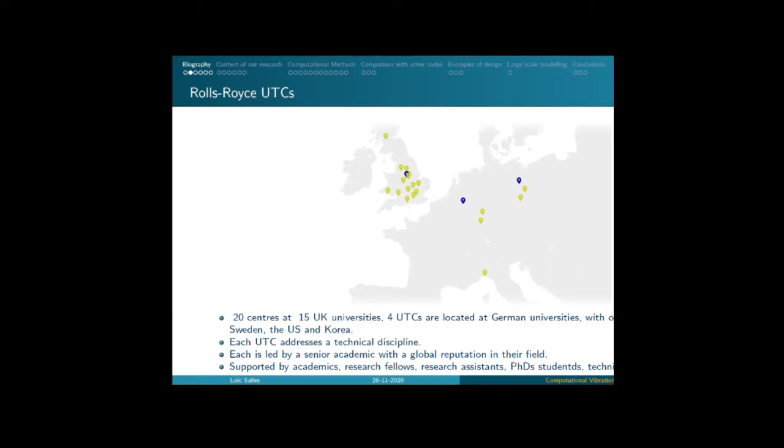So what are UTCs? UTC stands for University Technology Center. They are research centers dedicated to research for Rolls-Royce, funded by Rolls-Royce and also by governments through public funding. There are around 20 centers, most of them in the UK, and each of them has a technical discipline. In our case, it's vibration, and we were one of the first ones funded in the 90s, with the Oxford UTC. In those centers, you get academic research fellows, research assistants, PhD students, and technicians.

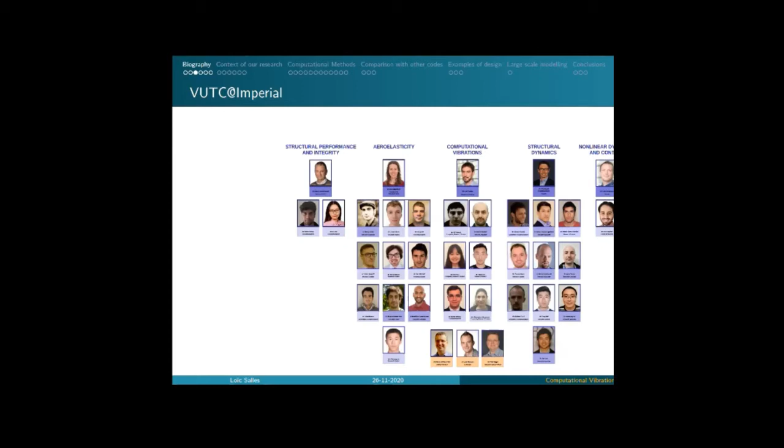So if we talk about the UTC at Imperial, we are 5 permanent people, or academics, with different topics. Some of them joined us quite recently, for example Ludovic Renson, so that's why his group is quite small. And of course, even if we have a division into teams, we all work together, and we have projects where we collaborate. Especially, we have a strong link between aeroelasticity and computational vibration. So that's the team in charge of computational vibration. Of course, people move and change every year, but that's the size of the team I am dealing with.

In terms of topics, aeroelasticity is mainly CFD, and we have a code called AU3D that was started more than 30 years ago, for forced response, flutter, seal flutter, all the things that can be an issue in an aircraft engine. Then we have computational vibration, which I'm in charge of, where we develop a code, FORSE, and I will talk more about it. Then we have structural dynamics, led by Christoph Schwingshackl, which is more on the physics of the dynamics, and also all the experimental work needed for the numerical methods, both for validation and to get the data to put in our models.

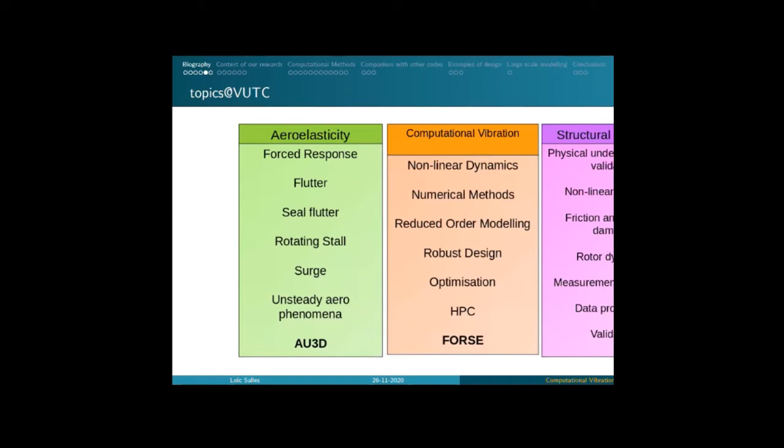So what is computational vibration? I came up with this concept. The idea is that instead of doing just vibration, we do vibrations, but with models that can represent large-scale structures. And for that, one important thing is that we need computing: high performance computing and very efficient algorithms.

So you need people that know computer science. Of course, we need the mechanics to understand the physics of what we are modeling. And we have a strong emphasis on mathematics, even if we are not mathematicians. So computational vibration is the mix of these three domains of research. And what we want is to develop efficient numerical methods for nonlinear vibration of complicated systems.

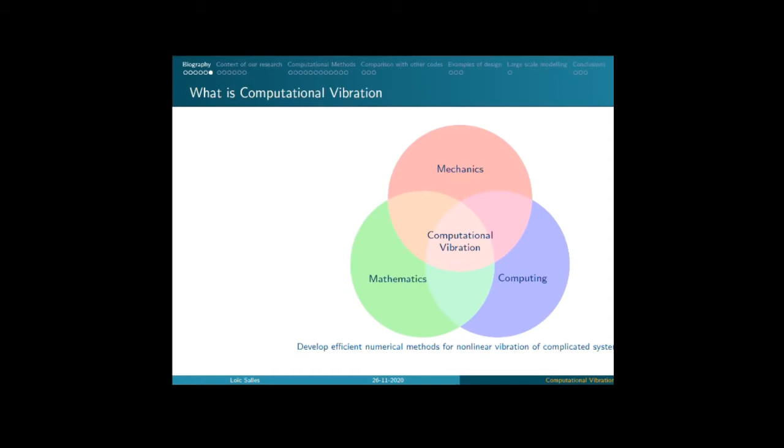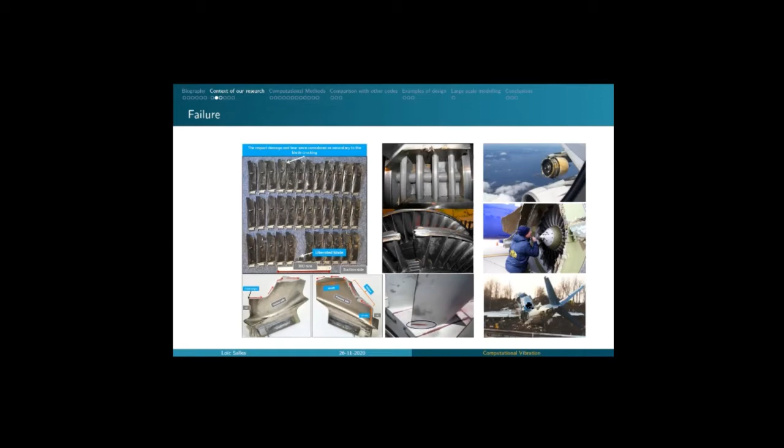And now, by complicated system, I will show you an example of one complicated system, that is an aircraft engine, and I will explain why we need to work on vibration. Unfortunately, when there is vibration in an engine, it can finish very badly, and it can lead to failure. So it can be just failure of the blade because of cracks that are propagating. And this is all right if it just stays in the blade and nothing else. But sometimes you can lose part of the engine, can lose a blade and it can go to the cockpit, or even worse, you can have the aircraft that crashes.

So I was quite nice. I gave 3 examples of 3 different engine manufacturers, but I won't say who is who.

In terms of method, the way the engineers deal with that is that they do a high cycle fatigue computation, and of course it's numerical with experimental validation, and of course their experience. You start from the geometry, you do what is called a Campbell diagram to compute the modes and see where you can have some excitation. Then you need the CFD, and you need to have a really good CFD code to be able to forecast the loading. That will allow you to know where your stress constraint is and where you may have issues, and then you will see if you have issues in terms of reliability or fatigue.

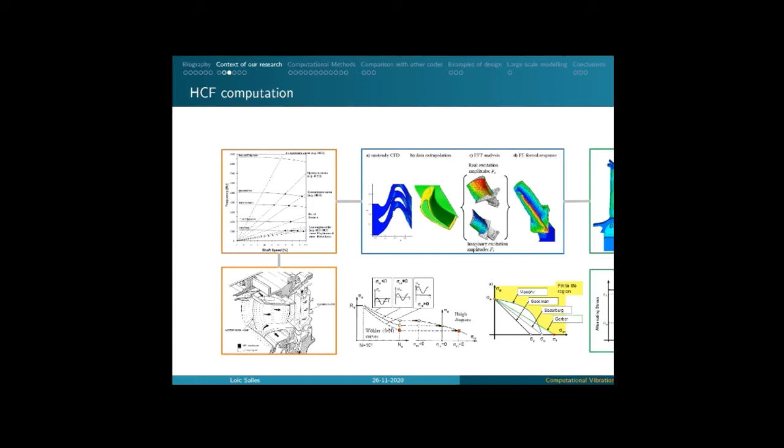And if you have issues, there is this kind of diagram that is called a Haigh diagram. If you are below this curve, you are okay, no real risk. If you are in this area, there is risk and you need to find a way to go below. And one of the ways to reduce the stress is to add damping to your system. And at the VUTC at Imperial, we work a lot on how we can model and design this kind of damping.

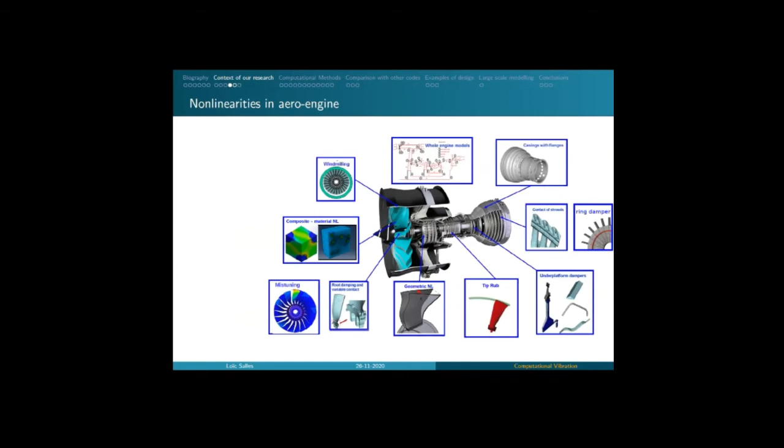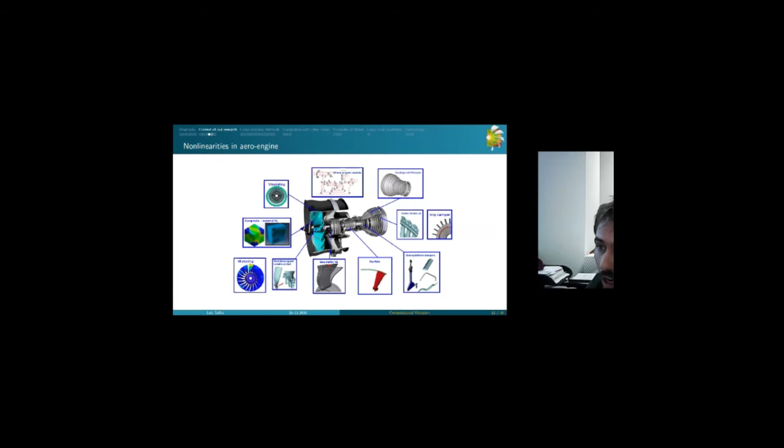Of course, the focus of our center is nonlinear vibration, because for linear vibration, I won't say it's sorted, but the methods are well implemented in industry and they know how to do it. But as soon as it becomes nonlinear, it's a little bit more complicated, and the methods are still in development. You can have a lot of nonlinearity in aero engines. It can be related to the contact that you have between, for example, the blade and the disc in the fan. It can be in the shroud. It can be also on the static part, so the flange in the casing. But also sometimes you will add some nonlinearities to increase damping, for example, under platform dampers.

Then you have other sources of nonlinearities which are a little bit more complicated and can be really a disaster, when the blades touch the casing. So if you have a tip rub event, or also if you lost a blade and you start to have windmilling, even if the engine is stopped, the engine can still vibrate and the blade can touch the casing. A new thing related to the new design of blades is geometric nonlinearities, and Alessandra will talk a lot about it, so I won't focus too much on it. So as you can see, there are a lot of things in terms of nonlinear vibration that you may have to deal with when you design an aircraft engine. So for us, it's really a nice tool to develop new methods and to work on these interesting phenomena.

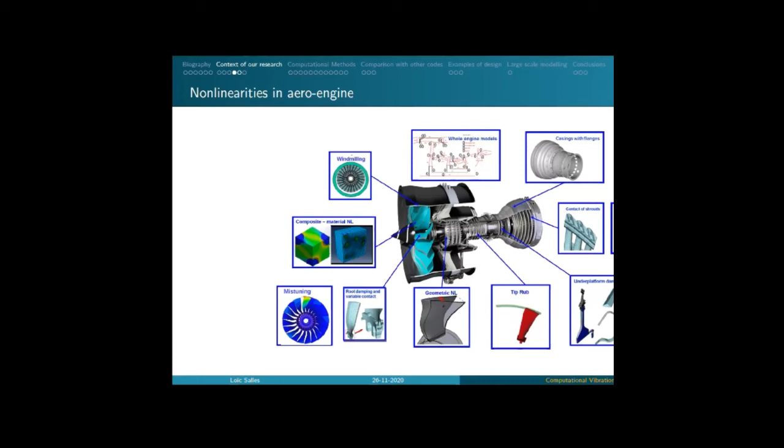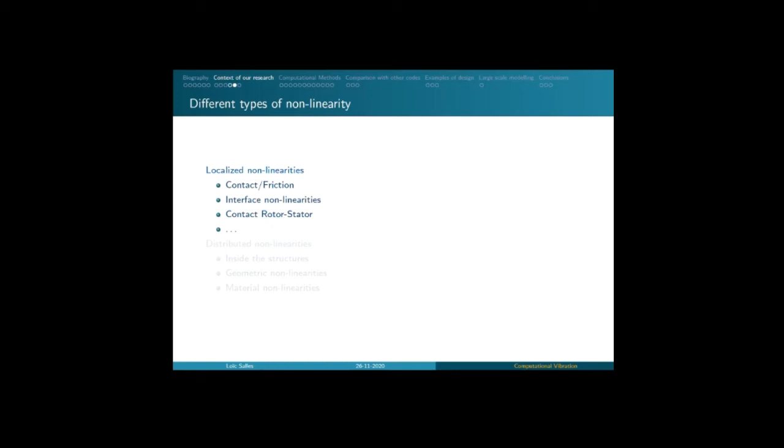If we look at the nonlinearities in our community, we like to divide them in two families: what we call localized nonlinearities, so contact friction, interface nonlinearities, or contact between the rotor and the stator. Localized nonlinearities means that we consider that the nonlinearity is only at the interface and very limited to an area of the structure, and that we can consider the rest of the structure linear. And that has a huge advantage, especially when you develop reduced order modeling techniques.

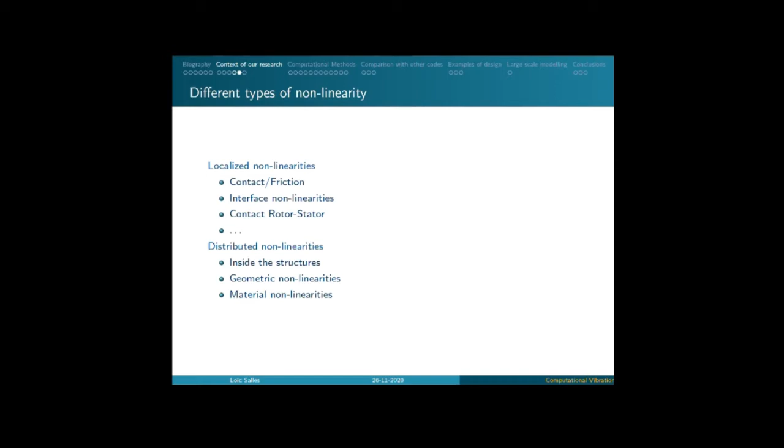On the other hand, opposite to localized nonlinearity, you have what we call distributed nonlinearities, which is what happens inside the structure. That can be geometric nonlinearities or material nonlinearities. For example, if you have a composite material with carbon fiber, you can have the behavior of your matrix and also the behavior of the carbon fiber with the rest of the material. So of course, we develop different techniques depending on whether it's localized or distributed nonlinearities.

At the VUTC and for Rolls-Royce, we have a code that is called Forced Response Suite. It was started 20 years ago by Evgeny Petrov, and it's developed in modern Fortran with an object-oriented programming paradigm. So in terms of programming it is modern, even if it's Fortran, I mean the paradigm that we use. It's more than 100,000 lines of code. And the interesting thing is that just the pre and post processor has more lines of code than the code itself.

And some figures: the code is used every day by Rolls-Royce for the design of new components and also for understanding unexpected events, so when there is an issue. And it's used by approximately 50 users.

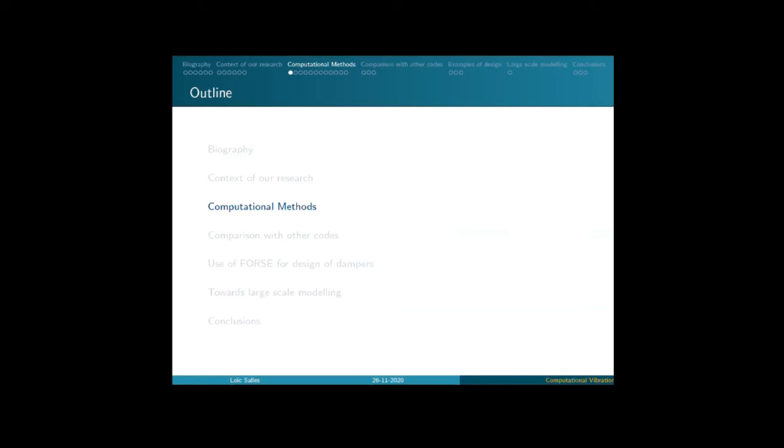So what are the methods behind this code? Before going into detail in the method, even if I won't go really into detail, it's how we organize our simulation and our modeling. This is our strategy, and it also shows the methods we have to work on. So we start from a geometry, and I have to admit we don't really work on the meshing and the geometry itself. We leave that to other UTCs and to Rolls-Royce. So usually when we start, we already have a mesh and a finite element model.

Then we need to reduce the model because we cannot solve the full model directly. That would be too many nonlinear equations. Then, depending on the physics we want to solve, we need to put in nonlinear laws. So if it's contact, usually it's a hysteretic behavior. Then we have the technique to model the differential equation, and in our case we use the harmonic balance method with alternating frequency time, and I will talk about it a little bit later.

And then we develop a lot of techniques around continuation methods to be efficient and be able to handle this dynamic problem. So in theory, once you have all those components, you have all your numerical methods. But one thing is missing: you need to validate. So you need experimental results to validate what your numerical results are saying. Because if it's not validated, you never know if your code is giving you the right result.

And doing validation is quite interesting because you also learn a lot. So I'm not going to show results here, but I can tell you that when we started to do validation for contact modeling, in the end we learned a lot and we had to do new development and improve what we were doing.

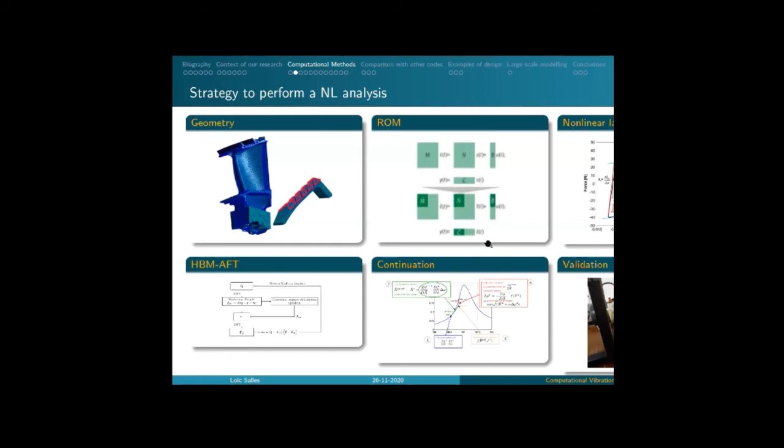And that's a difficult one because it's where you need the software developer, but it's very difficult to find funding for that because usually the agency considers that this is not research and it's more engineering. And it's really a problem. And so far we didn't really find a proper solution for that.

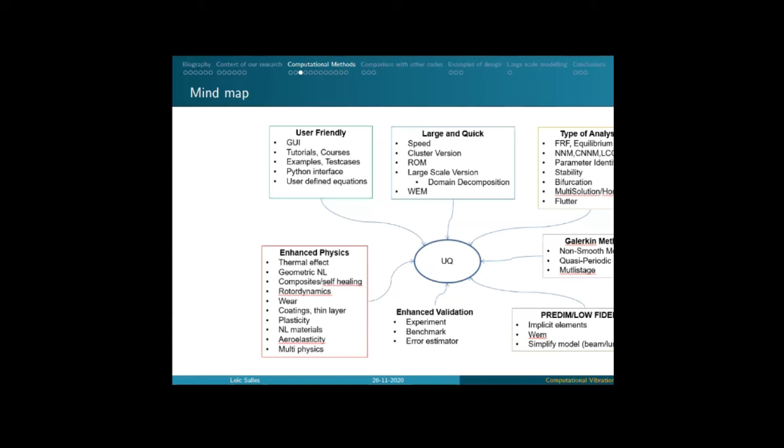One thing, and I know that Alice, you work a lot on that: we also linked all those things to uncertainty quantification. And we have some papers where we show some results of how we can couple uncertainty quantification with nonlinear vibration. And I think we are quite good at that, but I'm not going to show results on that. Everything I'm talking about, if you go on Scholar, you will see papers where we show results in more detail on all those things.

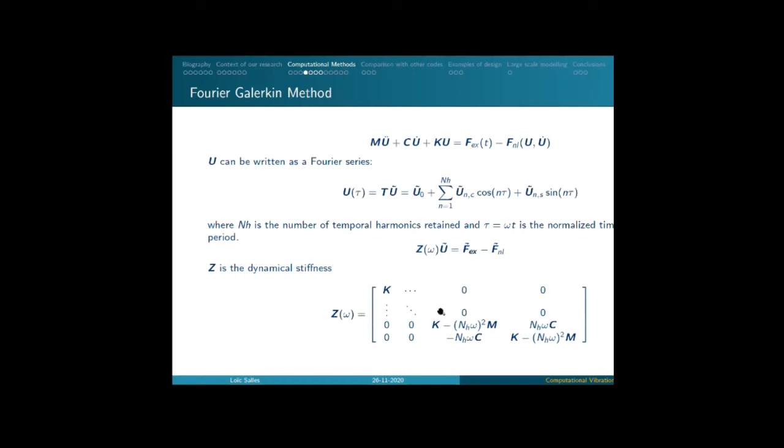So how do we model the problem? We start from a discretized problem, usually in finite elements, where we put the nonlinear force on the right-hand side because, as I said, most of the time they are localized, so we consider that they are a kind of external forcing. To solve this differential equation, we say that it's periodic and that we can use Fourier series. Then with the Galerkin procedure, we can transform the problem into an algebraic problem that is nonlinear and that we can solve.

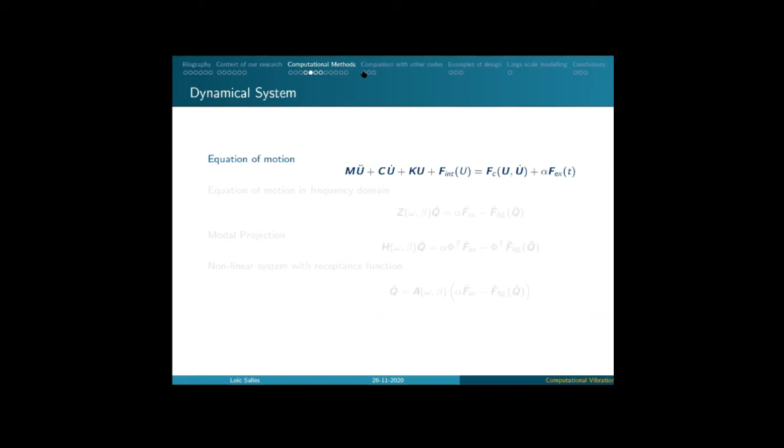And I see that I'm already taking a lot of time, so I will jump directly to what we can get with our code when we use it. So it's a comparison just to show the results we can obtain with the code we develop. And there are not a lot of results existing in the literature where you can see the time. So I found this one, published by people from ETH, where they compare different codes and their code that is called SSMTool.

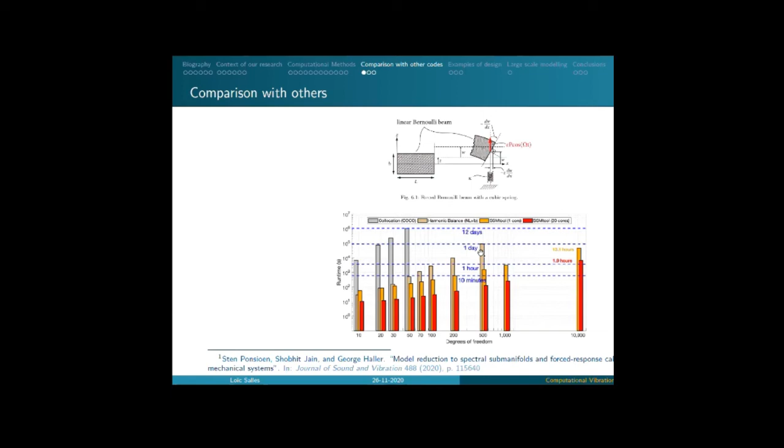And what I'm going to show you with the results we obtain in FORSE is how, when you use the fact that the structure is linear and you reduce your problem to the nonlinear degrees of freedom, you can be much faster. So if I take here 500 degrees of freedom, what they show with all the results is that you are between 10 minutes and 1 day, depending on what they are using and how they set up their model. When we use FORSE, it takes 2 seconds.

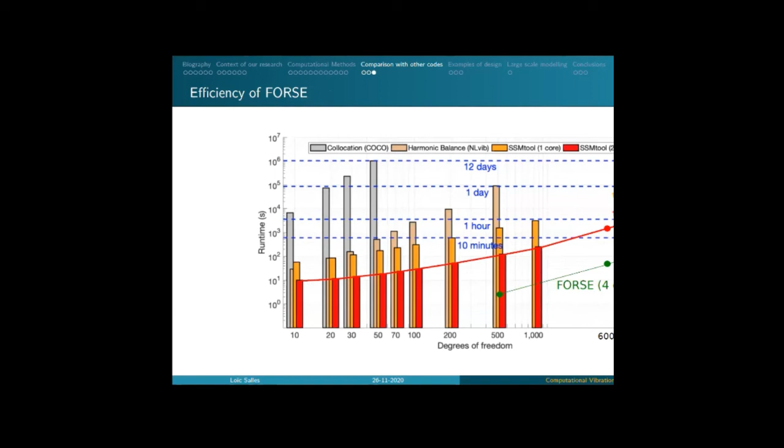Then we compare for more degrees of freedom, and that's where we are. So we have 2 orders of magnitude less than SSM tool. And it's just because we are using the dynamics of the problem and the physics of the problem to really come with an optimal way of reducing the size of our problem.

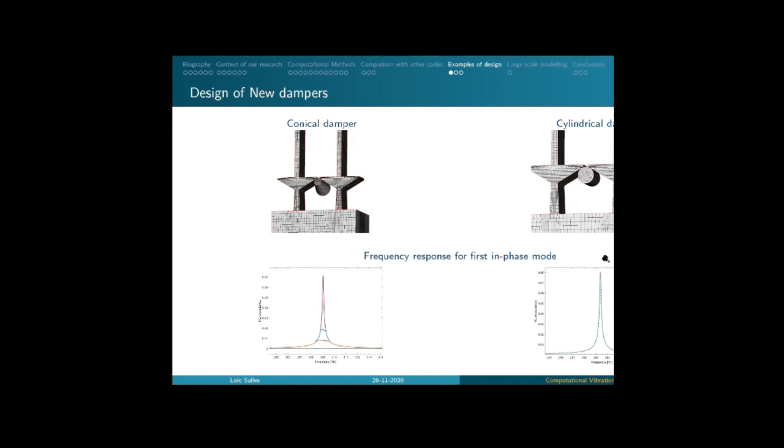So then some examples of what we can do with the code. Of course, it's not just for playing. It's also that we can design new dampers. And one idea we had is to do a conical damper, because when you have a conical shape, like a cylindrical shape, you will have a contact that is quite robust. But we know that cylindrical dampers don't work very well because you will just have rolling and you won't have slipping to dissipate energy. While this conical damper that was modeled in FORSE, here you can see that you get a very good damping.

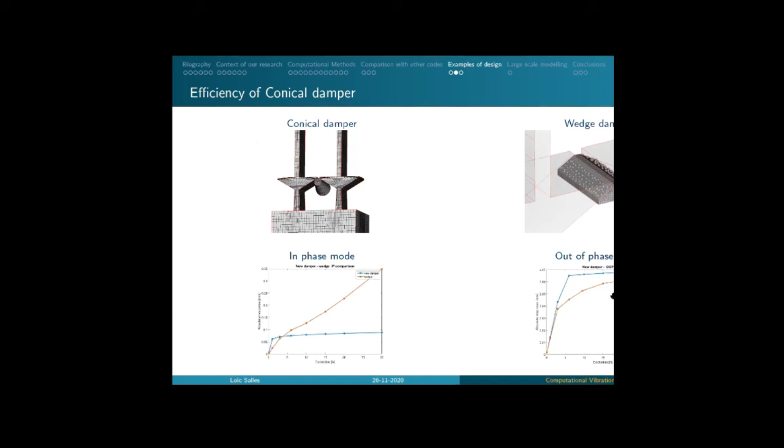And if you compare even against a wedge damper, you see that for the in-phase mode, the conical damper works very well, while the wedge damper is not very efficient. And we are almost as efficient as a wedge damper.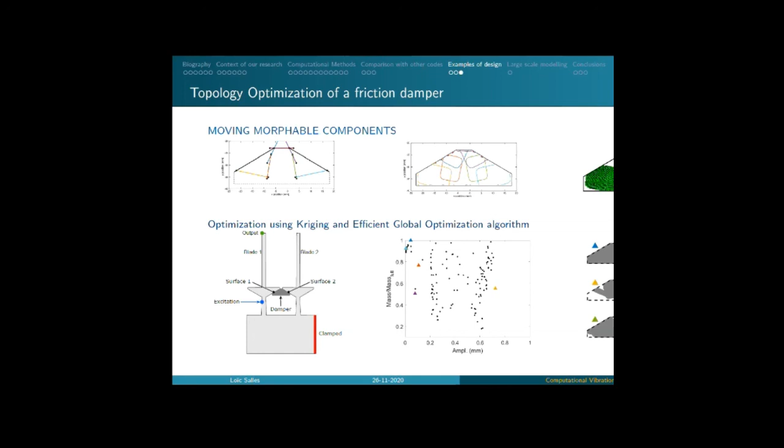Another thing is that as the code is quite robust and works well, we can link it with optimization techniques, and we are working with Enora Denimal on topological optimization. And the same, we are starting to get quite good and interesting results. That just shows that the code is really at a maturity that allows us to now start to do even optimization with the code.

And finally, the last thing I want to show is what we are working on now with a new code. It's in the framework of a European project where we want to solve large-scale models with not only localized nonlinearity, but distributed nonlinearity and geometric nonlinearities. And we develop a parallel code where you have to divide your geometry and parallelize on different CPUs. And that allows us, always linked with the harmonic balance method, for example for a fan blade test case, to be able to model the full system without any reduction.

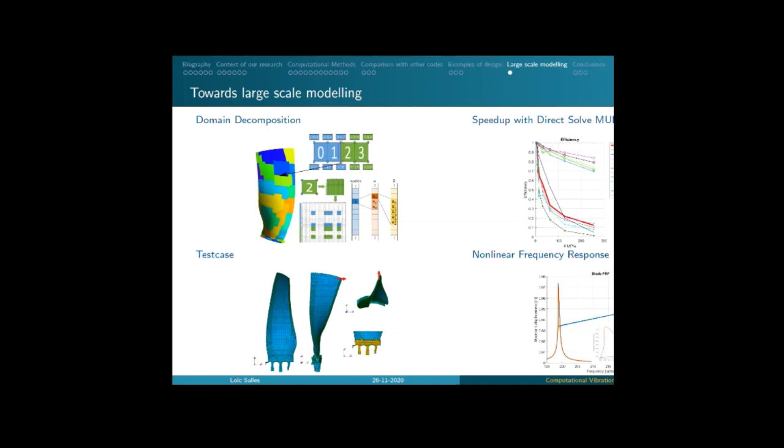And we are discovering some interesting phenomena, and it was not really a good victory, because especially you will see with what Alessandro shows that maybe the reduced order model is better than the full model. We just discovered that if you don't put enough harmonics, the dynamics of your system is completely wrong. So for example, in this case, if you have only 3 harmonics for the first mode, you will predict a stiffening effect, while if you put enough harmonics, in this case 5 harmonics, you have the proper dynamics, which is the softening effect. And this will kind of introduce what Alessandro is going to show after.

So, in summary, I didn't have too much time to show how the harmonic balance method is a flexible tool for nonlinear vibration, but you can go to our publications, and I'm happy also to answer any question you may have. Today we are really at a level, and we are not the only ones, in Lyon or other groups also, where it's really a good tool for nonlinear vibration and very efficient. We had good success with developing new ROMs for localized nonlinearity. FORSE really allows a large range of applications. I couldn't show all the applications here.

And then for the outlook, as I said, we are working on large-scale modeling toward billions of degrees of freedom. And we also need ROMs for distributed nonlinearities. And Alessandro will show you one example of very efficient techniques that can be used. And of course, it will be nice to use what we develop for other applications, for example UAVs, machining, floating structures, or those competition sails that are very interesting structures, and they also work in a nonlinear regime.